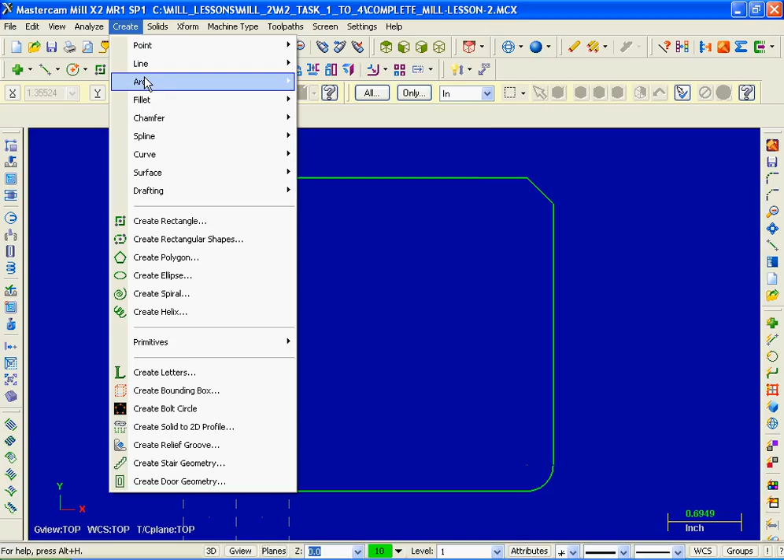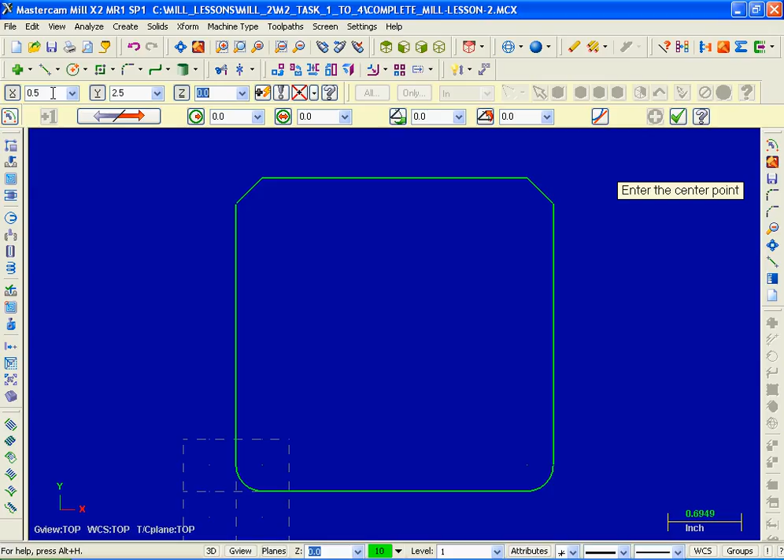I'm going to move up into Create, slide down and pick Arc, then Create Arc Polar. We're prompted to enter the center point. I'll click in the white box for X and input 0.5, tab over to Y and input 2.5, hit tab again, nothing to change in Z, so I'll hit tab one more time.

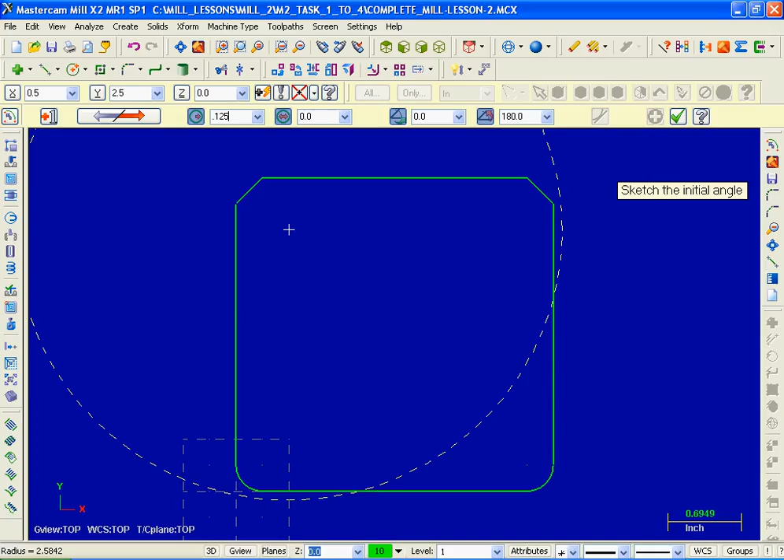Now the prompt changes to sketch the initial angle. I'll click in the white space for initial angle and set it to 0, hit tab, now we're in the end angle field, I'll enter 180 degrees, hit tab again. Now we're at the radius - the radius for these arcs is 0.125. Everything looks good, I'll hit enter. There's our first arc. Looks great. Up on the ribbon bar, I'll click Apply.

Now on to Arc 2. Again we're prompted to enter the center point. I'll move up, click in the white space for X, and enter 0.5, hit tab. Here we are in Y, input 0.5, hit tab. Nothing to change in Z, I'll hit tab again.

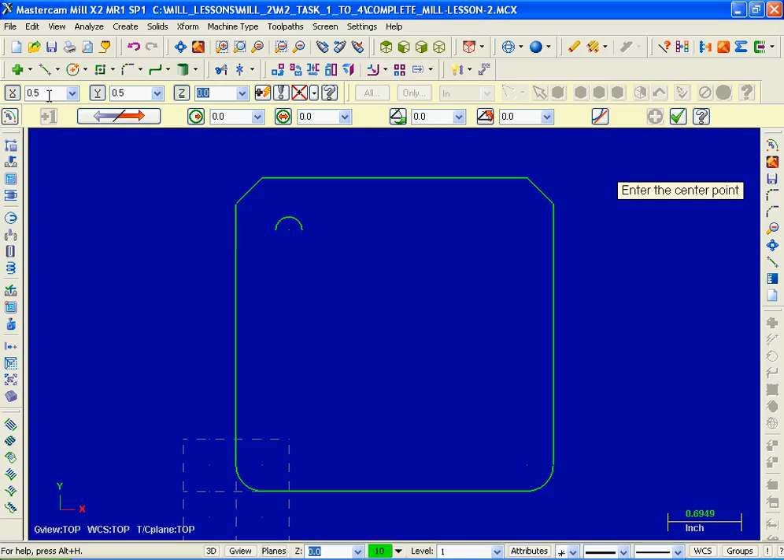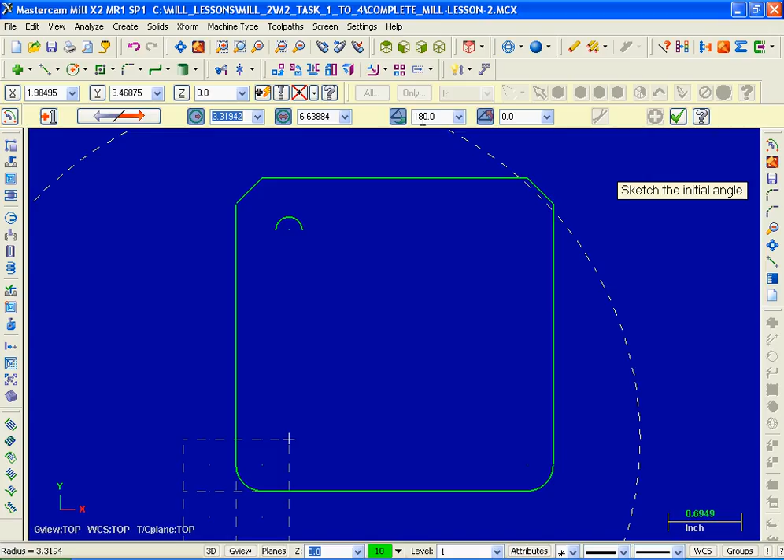Here we're prompted to sketch the initial angle. I'll click in the white space for start angle and this time input 180, hit tab, and here we are in the end angle field - this time I'll input 0, hit tab. The radius is 0.125, I'll hit enter. There's arc number 2, looks good. Same again, up on the ribbon bar I'll click Apply.

Now for arc 3. Again we're prompted to enter the center point. I'll click in the white space for X and input 2.5, hit tab. For Y, 2.5, hit tab again. Here we're in Z, nothing to change, I'll hit tab again.

Sketch the initial angle - I'll click in the white space for the start angle and input 0, hit tab, and for the end angle, 180, hit tab again. For the radius, 0.125, then as we've been doing, hit enter. I'll click Apply, and the first 3 arcs look great.

On to arc 4. Enter the center point - I'll click in the white space for X and input 2.5, hit tab. Here we're in Y, I'll input 0.5, hit tab. We're over in Z, nothing to change here, I'll hit tab.

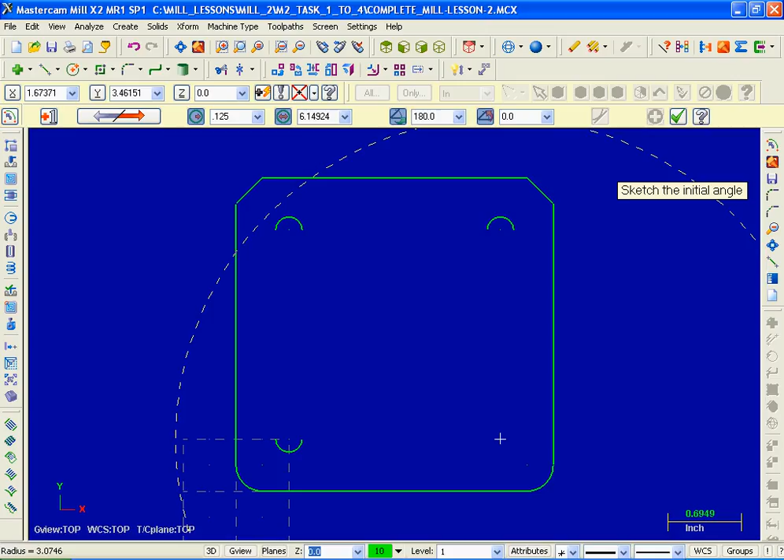Now we're prompted to sketch the initial angle. I'll click in the white space for start and input 180, hit tab. For the end angle, 0, then hit tab. Here we're in the radius section, I'll input 0.125 and hit enter. Looks good, so I'll click Apply, and we're done here in Arc Polar. On the ribbon bar, I'll click the check mark for OK.

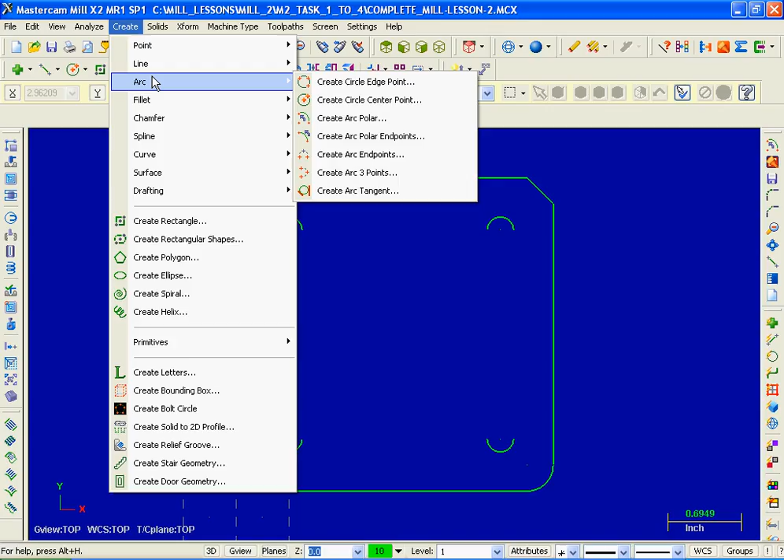Now for the 1-inch diameter circle at the center of the part. I'll move back up into Create, Arc, and select Create Circle Center Point, the second one down. The ribbon bar appears and we're prompted to enter the center point.

I'll click in the white space for X and input 1.5, hit tab. Here we're in Y, the Y value is 1.5, hit tab. Nothing to change in Z, I'll hit tab again.

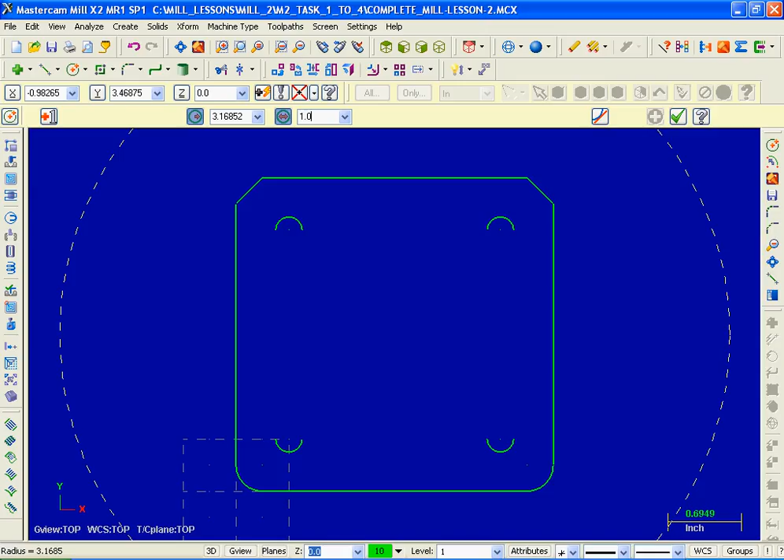Now I'll click in the white space for diameter, and the diameter of this circle is 1 inch. I'll hit enter - looks good - and move up onto the ribbon bar, click Apply, we're all done here, and click the OK green check mark, and there's our geometry. That completes this video. Thanks for watching.